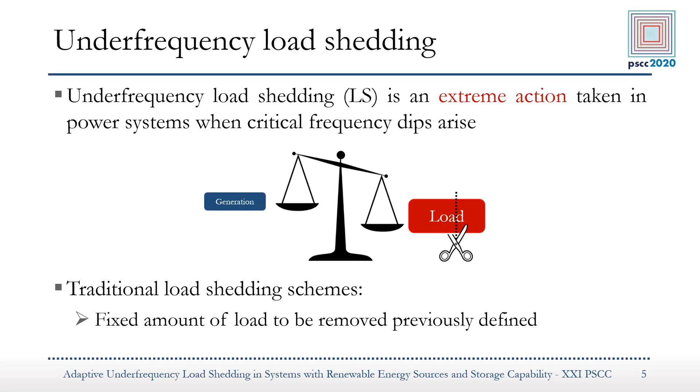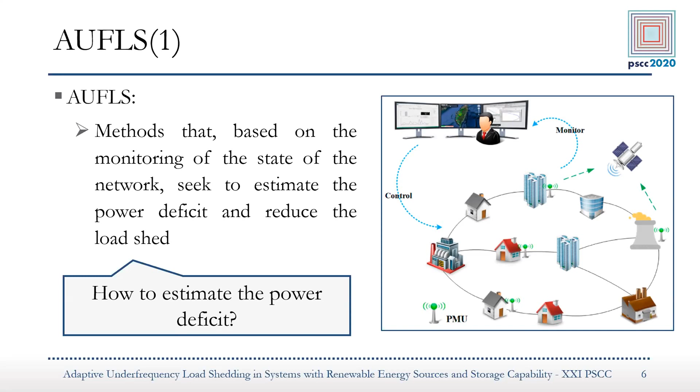To mitigate this effect, some studies propose the development of adaptive methods of load shedding. Methods that, based on monitoring the state of the network, seek to estimate the deficit and reduce the load shedding. So a question that can be asked is how to estimate the power deficit.

Many authors propose the use of the equivalent swing equation to estimate the active power imbalance. The use of this equation is based on knowledge of the inertia constant and the rate of change of frequency at the time of the disturbance occurring. This estimation is based on the natural inertial response of synchronous machines when a frequency sink in the system occurs.

However, the high penetration of renewable sources and energy storage devices causes a change in the conventional behavior of the frequency, and consequently, the adaptive method must consider this change for increasing the robustness of execution. So what are the impacts of the high penetration of these devices?

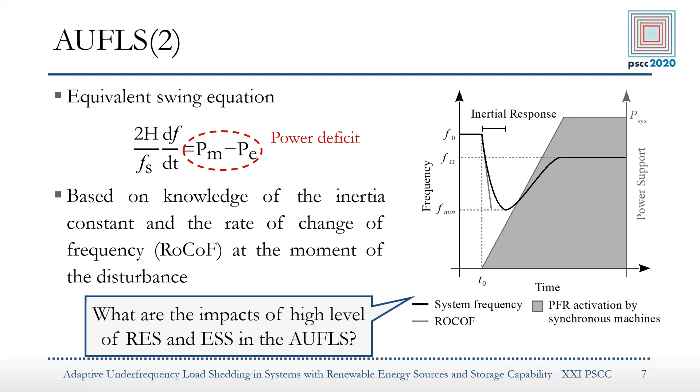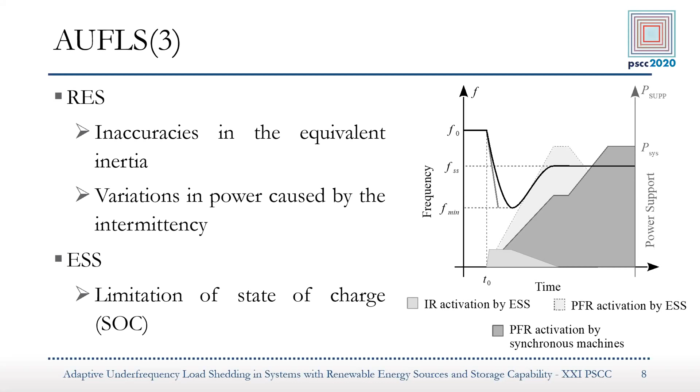Renewable energy sources impact mainly on two aspects: inaccuracy caused in the estimation of the equivalent inertia of the system and the power variations caused by the variations of the primary energy source. The storage devices can be used to supply a synthetic frequency control, providing an inertia response and a primary frequency reserve. However, due to the limitation of the state of charge, this supply can be interrupted during a critical condition of frequency sink, impairing the execution of the adaptive method. Such drawbacks mean that the adaptive method has to deal with these issues for a correct execution.

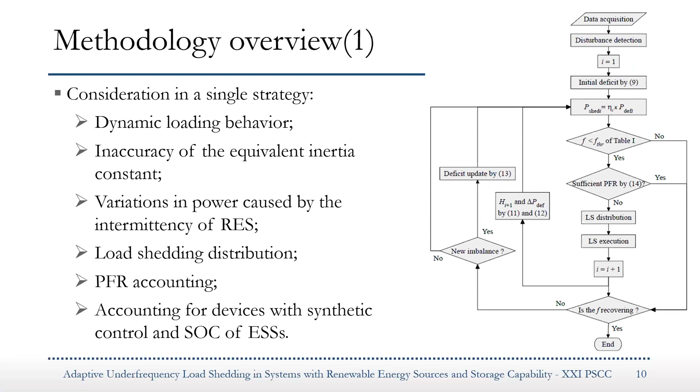In this context, the present method has been proposed. The proposed approach can be summarized by the flowchart. The proposed method presents features proposed in different references combined in a single scheme, such as these points. However, as our time is reduced, I will briefly go through the main points, such as the beginning of the method, data acquisition and disturbance detection. As a premise, it is assumed that these two operations are guaranteed considering the use of wide area monitoring systems, providing full network observability.

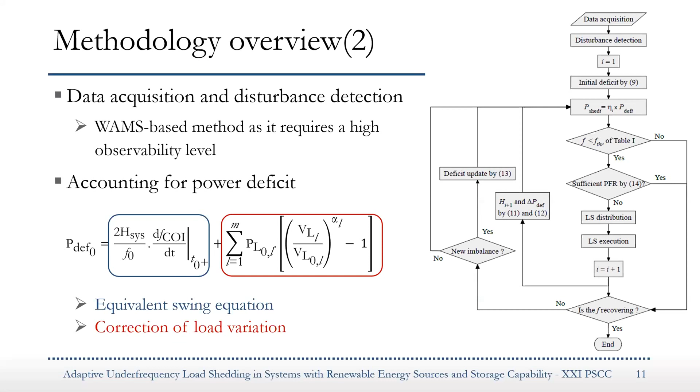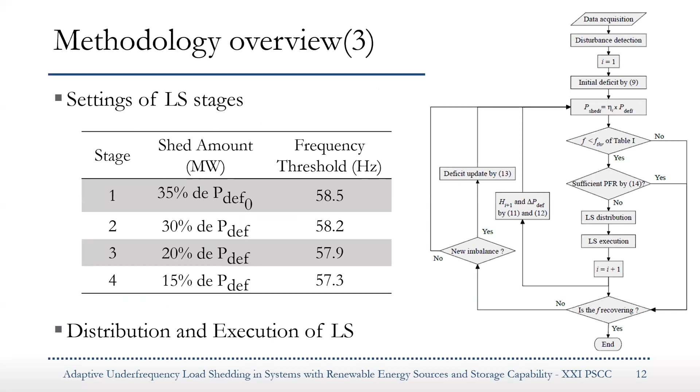If the frequency is falling and there is no capacity of the system to prevent this, the distribution of the shed is made between the loads and executed. An important question is about the update of the inertia constant and the power deficit on the system during the execution of the load shedding. Through the system response to a known disturbance, that is, the load shed performed, the system inertia can be corrected. The proposed method also considers the participation of devices with synthetic control in the inertia response.

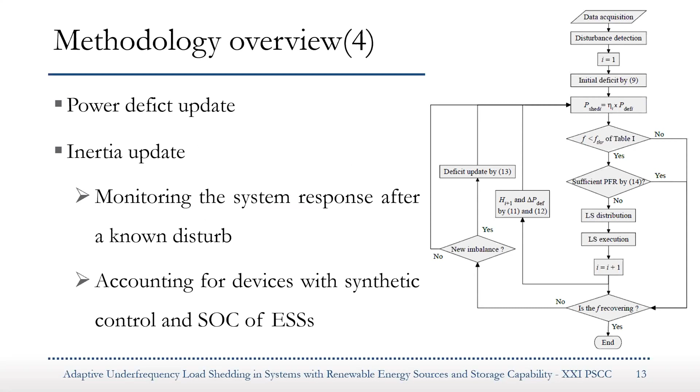As an example used in the study, the modeling of storage providing inertial response and primary reserve. The proposed method is not specific to any type of storage or control. It's enough to know the inertial behavior in relation to RoCoF and the level of the state of charge as follows. In this work, we adopted that if the level of SOC is between 10 and 20%, the device is in the cut-off zone, where the increment of the storage should not be accounted for as power support by the method.

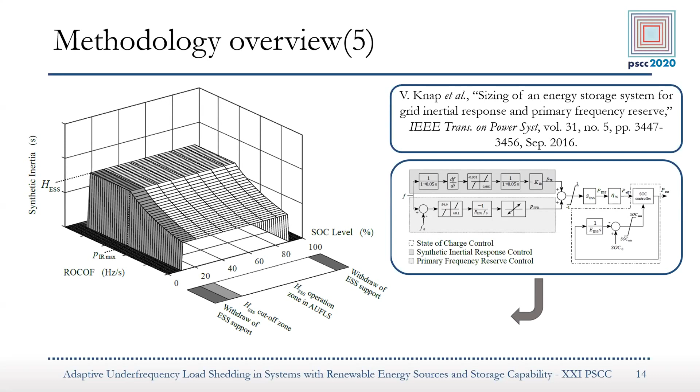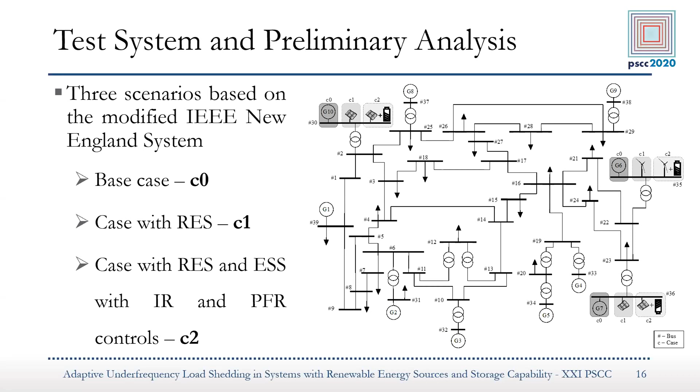And the third and last case, C2, consists of the application of energy storage with inertial response and primary frequency reserve in conjunction with the RES of case C1. The next step is to evaluate the performance of the proposed method in 3 different scenarios, comparing the proposed approach with 3 other methods of load shedding. The first method, called LS1, is an adaptive method proposed in this reference. The second method, also an adaptive method, called LS2, was taken from this reference. For the sake of time, I will not be able to go into details of each method, but it's important to note that the method proposed in this work has characteristics present in both works. And finally, the third method, a traditional method based on the Brazilian load shedding schemes.

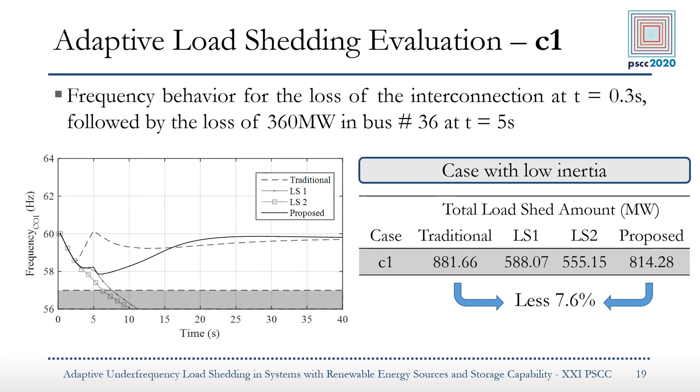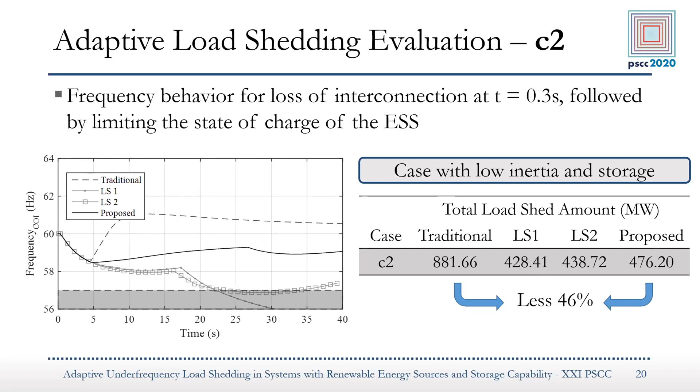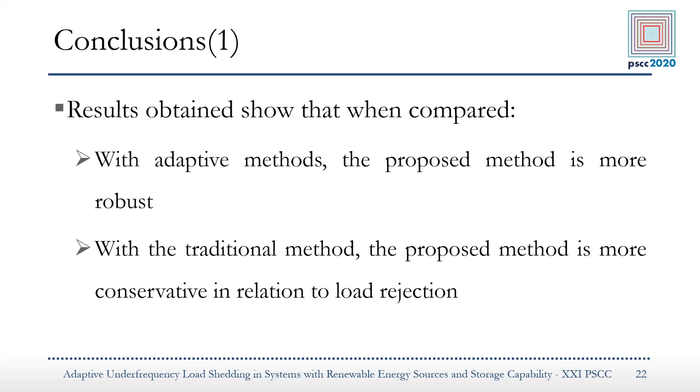Finally, the conclusions drawn from the development of this work. The results obtained show that when compared with adaptive methods, the proposed method is more robust, and when compared with a traditional method, the proposed method is more conservative in relation to the load rejection.

However, the proposed approach is a response-based method and requires a high observability level. Therefore, future analysis should evaluate the method performance against inaccuracies, delays, and noise.